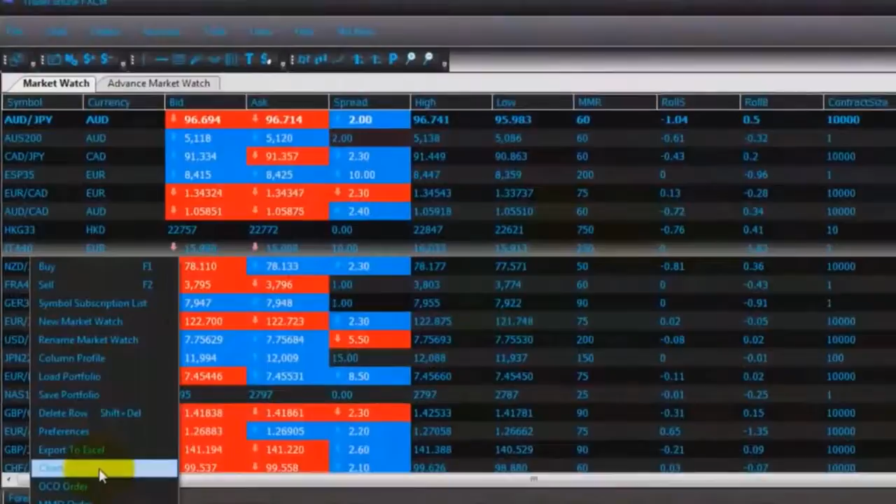In the real world, the answer to the question of can we see into the future has been answered with a resounding no. In our ever-evolving society, the trend today is to look toward the future by relying on predictive modeling to best predict the probability of an outcome. But we all know that even these well-thought-out predictions based on data often turn out to be not so predictable.

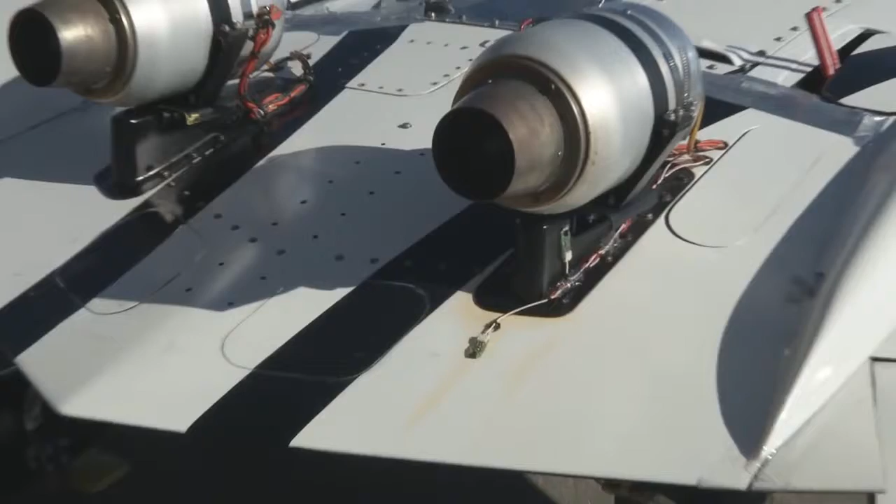Although it's clear that future events remain virtually unknowable, there is one group within NASA that comes as close as you can to seeing into the future. Throughout NASA's field centers, members of the Fixed Wing Project team are peering into the future every day and coming up with concepts that they believe will be on the next generation of aircraft. Because it takes years to plan and develop these concepts, the hardware and theories that are being tested today will be key components that enable the next generation of aircraft to take flight.

On this episode of NASA X, follow us around the country as we visit members of the Fundamental Aeronautics Program's Fixed Wing Project, who are developing the framework that will shape how aircraft of the future will fly. Take a look behind the gates of NASA to see what some of these new ideas look like and how the engineers of NASA are paving the way for the ideas that will change the future of flight.

To the untrained eye, most of the aircraft of today look very similar. This is because over the past century of flight, aeronautical engineers have worked hard to optimize passenger aircraft to the point where they are as efficient and safe as possible. As a result, the basic tube and wing shape has been configured and examined from every possible angle, making it the most efficient design possible today.

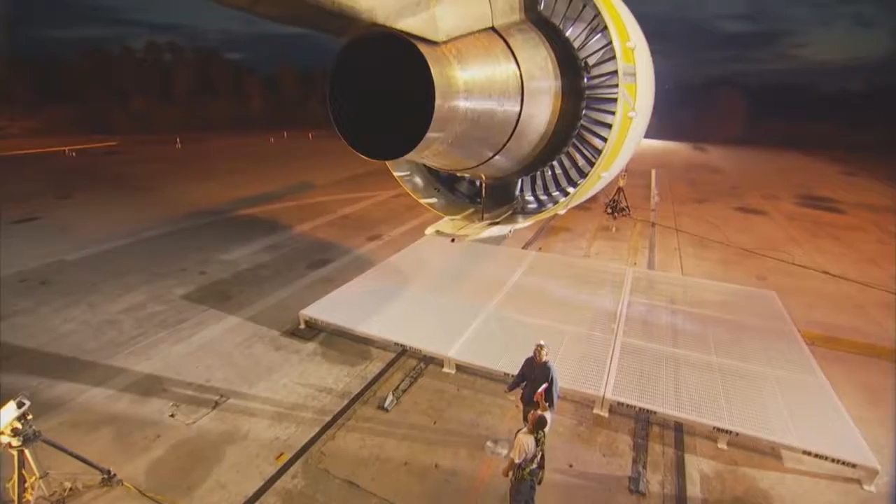Although aircraft have looked basically the same over the past few decades, if you look closely, you can see some of the major design changes. Wings that were once swept back more dramatically now are less so because of advances in aerodynamic shaping. Engines that spewed emissions by the ton are now much more efficient. Materials that were once so heavy that they significantly weighed down a craft are now much lighter and stronger.

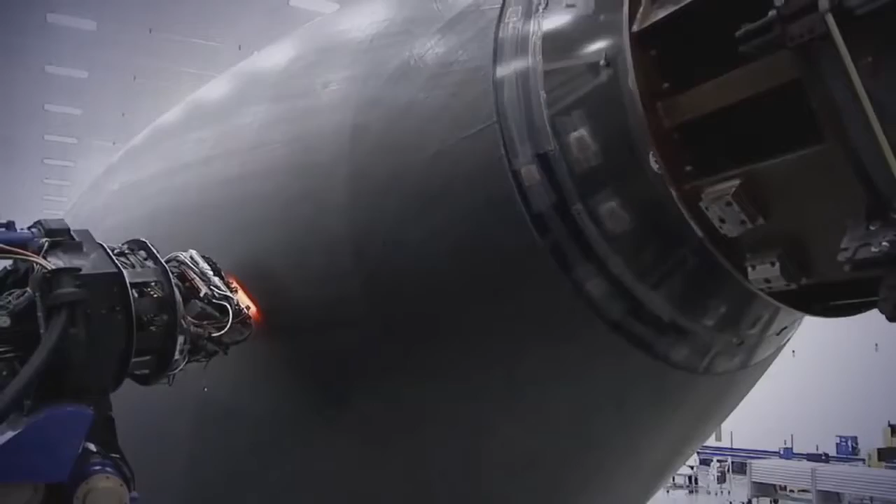With all this improvement and efficiency, it is fair to ask if there is anything else that can be done to make flight even better. The answer is of course yes. Behind the gates of NASA, there are scores of researchers who know that we can still make aircraft better because they are working toward these long-term goals every day. Some of these researchers from the Fixed Wing Project are working on so-called N+3 configurations and goals.

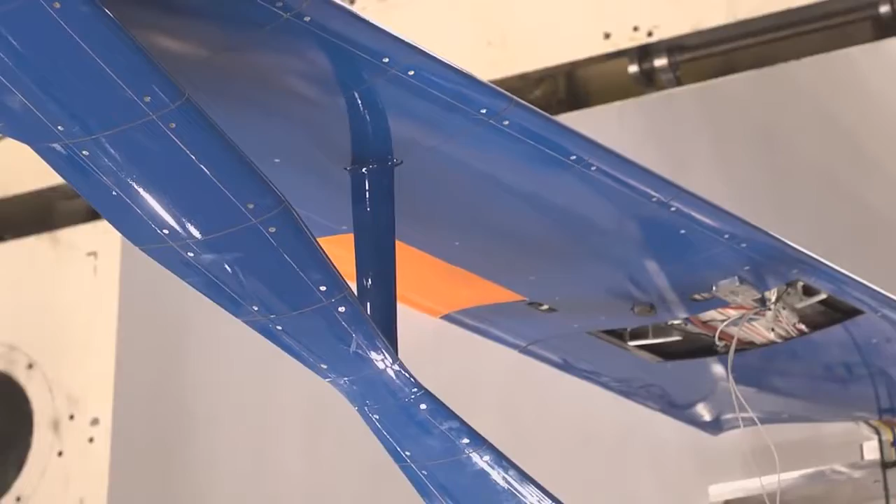In mathematical terms, the letter N is where you start now. N+1 is the next step. N+2 is just beyond that, and so on. Here in the Fixed Wing Project, N+3 equates to aircraft that will be flying in around the 2030-2035 timeframe. For this team, everything is on the table, including engines, fuels, wings, and fuselage shapes.

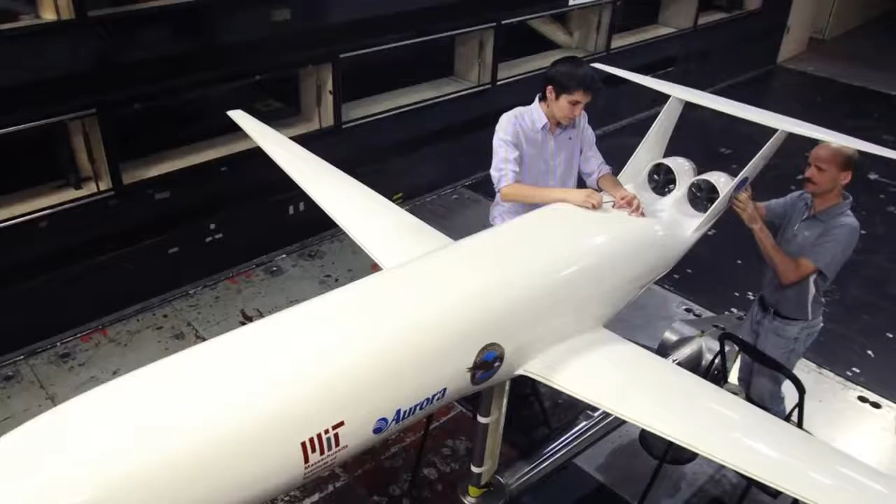Well, we need to remember the first A in NASA is aeronautics. So it's a National Aeronautics and Space Administration. Aeronautics is the field of research for airplanes. The airplanes that fly today were researched and experimented with within NASA many years ago. So we're trying to continue that tradition, that important work that we have done for the nation and the world, for 20, 30 years from now.

Fixed Wing is a NASA research program in which we are doing activities to try to improve the airplanes that we're going to be flying in the future. We're trying to make them less noisy. We're trying to make them better for the environment. We're trying to make them in a fashion that they will use less fuel.

The research we're doing is important because air travel is such an important part of your life. People travel, and even if you don't travel, cargo gets carried every single day. You use something every single day that gets carried by an aircraft. It's part of our way of life these days, and it often gets taken for granted. There are challenges though, so we are focused on exploring and developing technologies and concepts to improve the energy efficiency and environmental compatibility of transport aircraft.

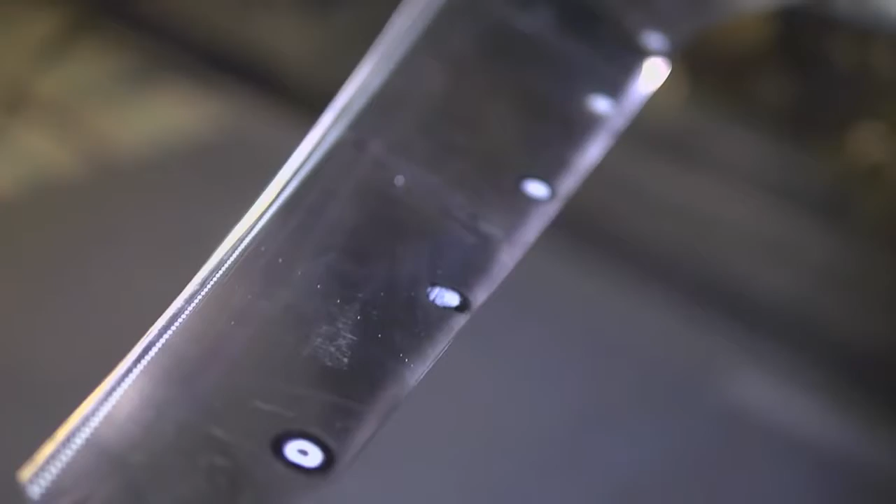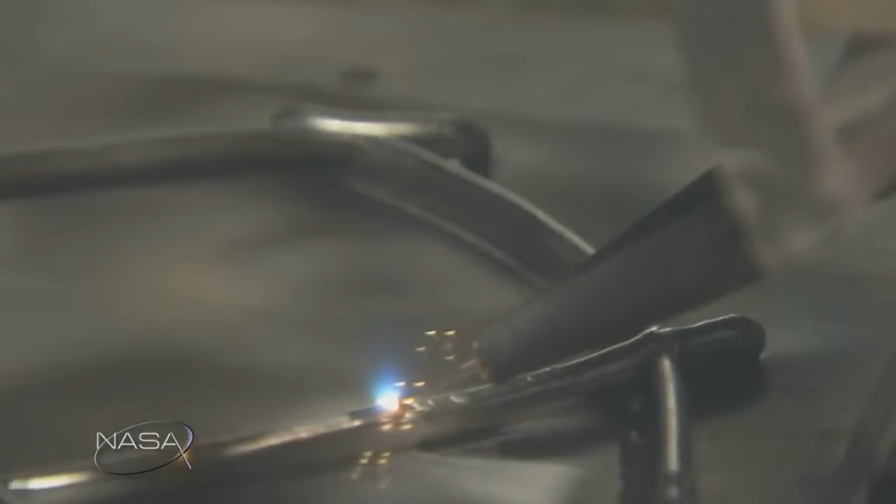With this mandate to significantly lower noise and emissions and increase performance for subsonic aircraft, there will be a need to address virtually every aspect of the current aircraft configuration, including developing new materials and engines, testing alternative fuels, and even changing the fundamental shape of the aircraft.

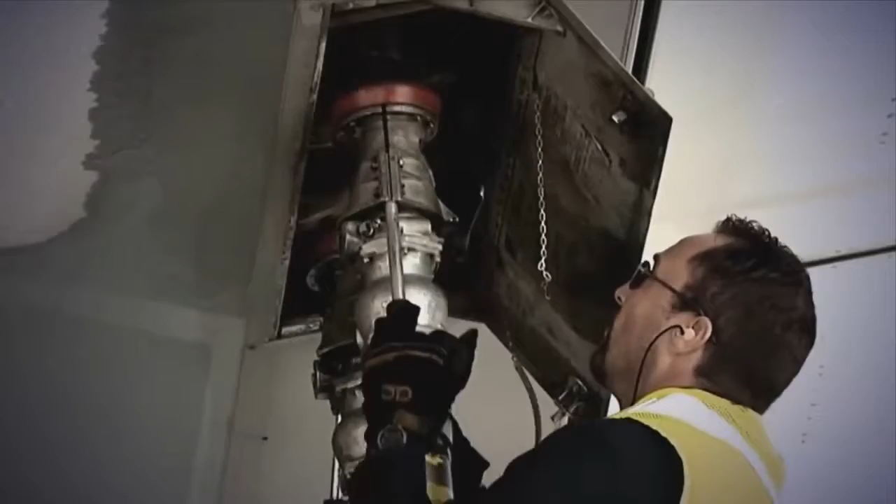All across the country, fixed-wing researchers are doing just that. Major advancements are being made into the understanding of how future aircraft will fly. Because there are so many areas of study, let's first look at something that has the potential to be used today as well as in the 2030 timeframe: alternative fuels.

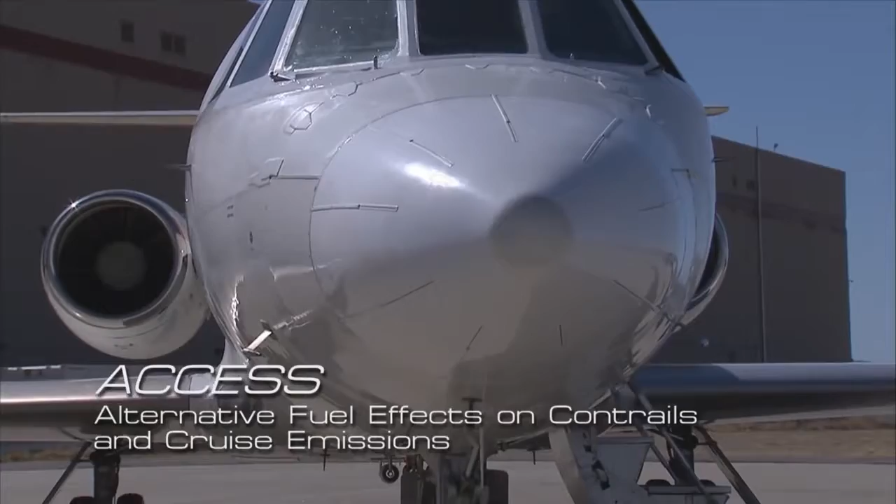On this beautiful morning at NASA Dryden in California's high desert, a test called ACCESS, or the Alternative Fuel Effects on Contrails and Cruise Emissions test, was performed to study the effects of alternate biofuel on engine performance, emissions, and aircraft-generated contrails at altitude. For this test, 2 aircraft were flown in tandem. The first is NASA's DC-8, which will be burning an alternative fuel.

The second aircraft is NASA's Falcon that will fly directly behind the DC-8 to measure and characterize the emissions coming out of the engines from the alternative fuel. Here is NASA's Bruce Anderson to explain. NASA's role is in assessing the combustion characteristics of alternative fuels, as well as determining how these fuels will affect the performance and emissions from aircraft.

To understand how aircraft affect the climate, we need to make measurements at cruise altitudes. So the focus of ACCESS, or the alternative fuel effects on contrails and cruise emissions, was to fly behind the DC-8 in flight and look at its emission and contrail characteristics as we changed from standard jet fuel to a fuel that was a blend of a fuel that was made from camelina plant oil, and also added 50% of Jet A to that.

There are some other groups out there. Tyson Foods is making a biodiesel and biojet fuel from chicken fat that they sweep up on their processing plant floors. So there's a number of different ways of making these alternative fuels. All of them result in a fairly clean kerosene that doesn't have nearly the contaminants in it that the fuels from refineries do. The fundamental thing is the aircraft has to retain its performance characteristics when you burn a fuel.

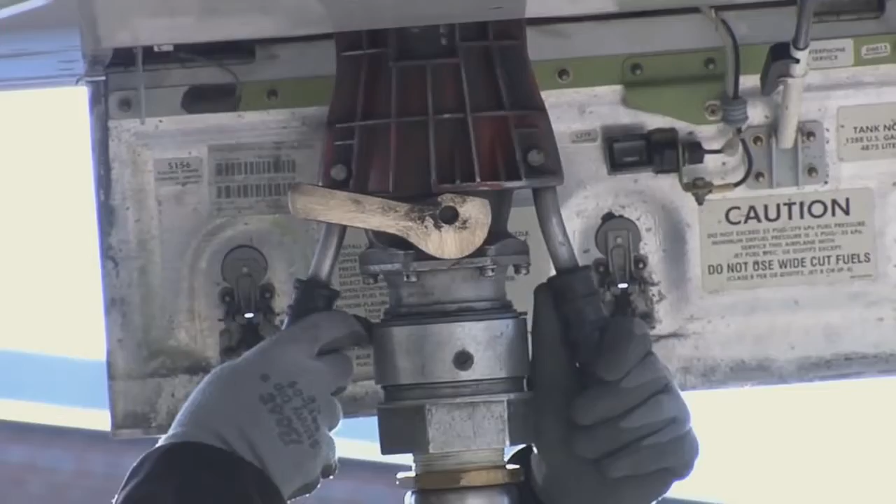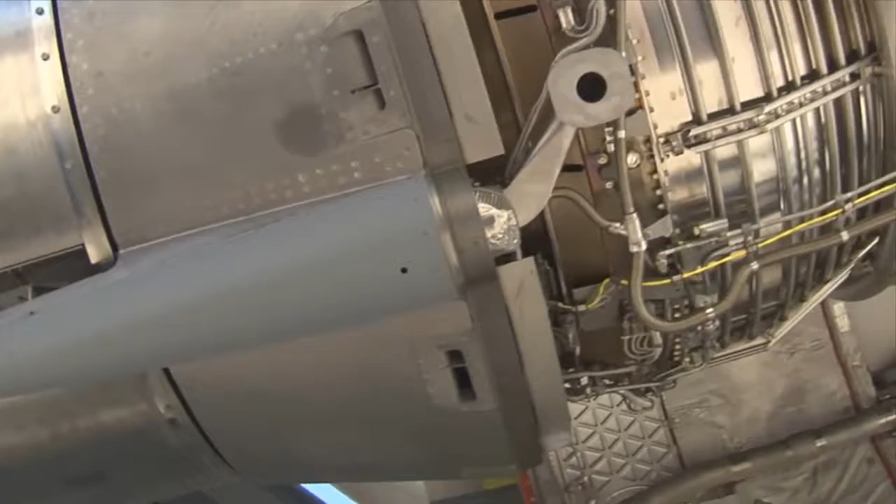You can't have any drop in power. The fuel also has to have similar characteristics in terms of density and volume to kerosene. So what we're looking at is drop-in fuels. A lot of the fuel systems on the aircraft are designed to rely on the aromatics in the fossil fuels to swell the seals to make them leak tight. So when we fly an alternative fuel, we have to mix it with standard fuel to retain those properties. Otherwise, the fuel would just leak out of the aircraft.

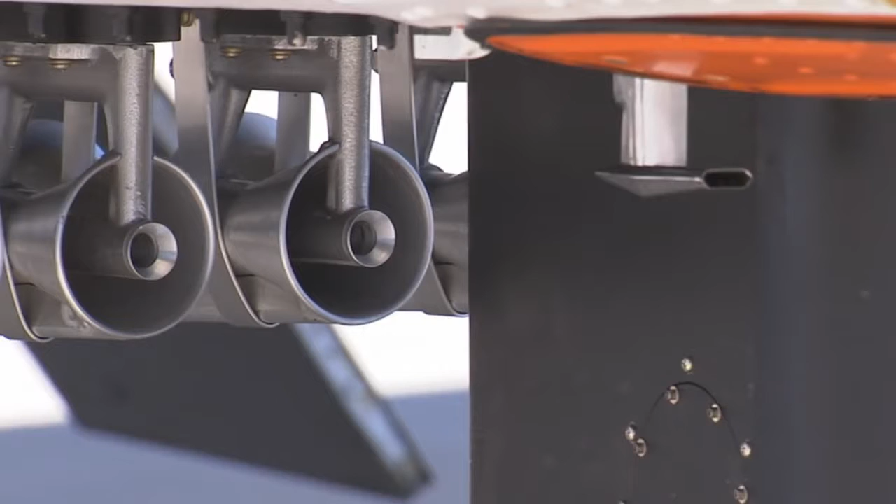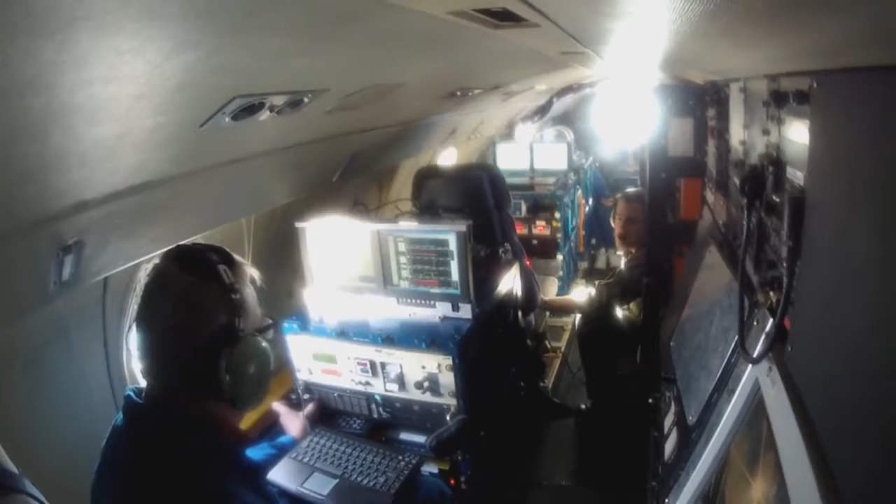And then the second thing we're looking at is just the emission characteristics. By that I mean the amount of pollutant generated per kilogram of fuel burn. After the first few flights, it was shown that using these types of alternative fuels could significantly reduce emissions at cruise altitudes, particularly soot emissions. Work continues to better understand how to use these fuels and how to make them even more efficient for future aircraft.

Other than alternative fuels, there are some other ideas out there for finding more efficient ways to power aircraft. If we look on our roads today, many of the cars that are now being driven run on a combination of fuel and electricity. The idea that aircraft could do this seemed far-fetched only a few short years ago, but today, this idea is gaining traction. There are several ideas on how to do this, so let's take a look at a few.

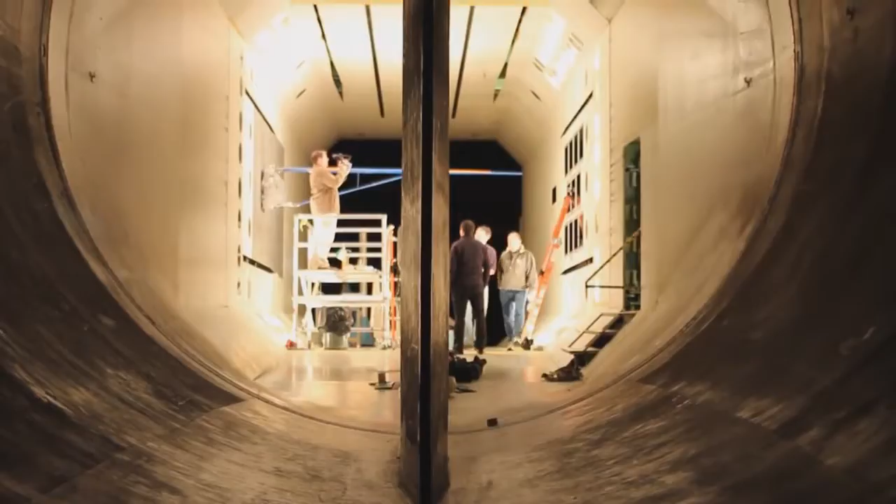Here, a team is looking over a new Boeing aircraft design called Sugar Volt. This unique design has several interesting changes, like the truss-braced wings that have the potential to reduce the drag of the wings by making them longer and thinner. Because thin, long wings have the tendency to flex more, designers have included a clever, efficient truss structure to support them. This design has the potential to reduce drag and weight, thereby making the craft more efficient to operate.

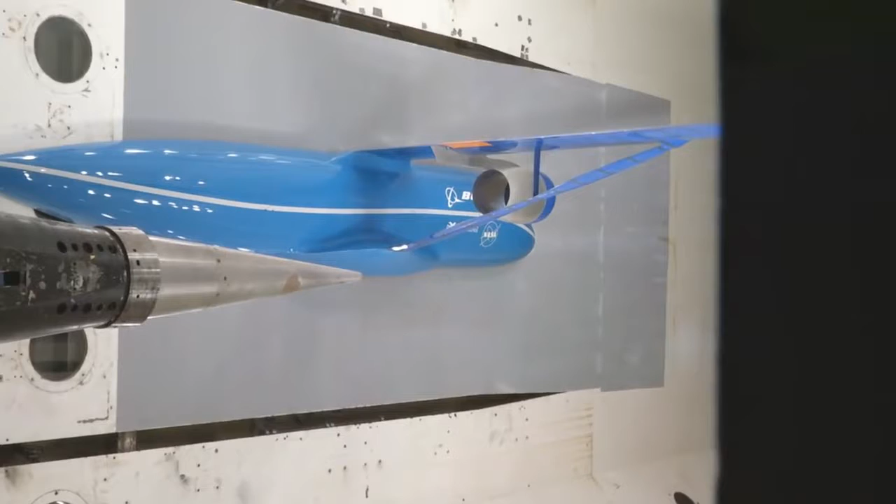At first glance, those unique structural changes may look like the biggest game changer for this type of aircraft, but the Sugar concept holds another surprise as well. In the case of the Sugar concept, what's less obvious to the eye when you see it is that it has an unconventional propulsion system. It's a hybrid gas-electric concept that's closer to what you see in a Prius. It has batteries and a gas turbine engine technology.

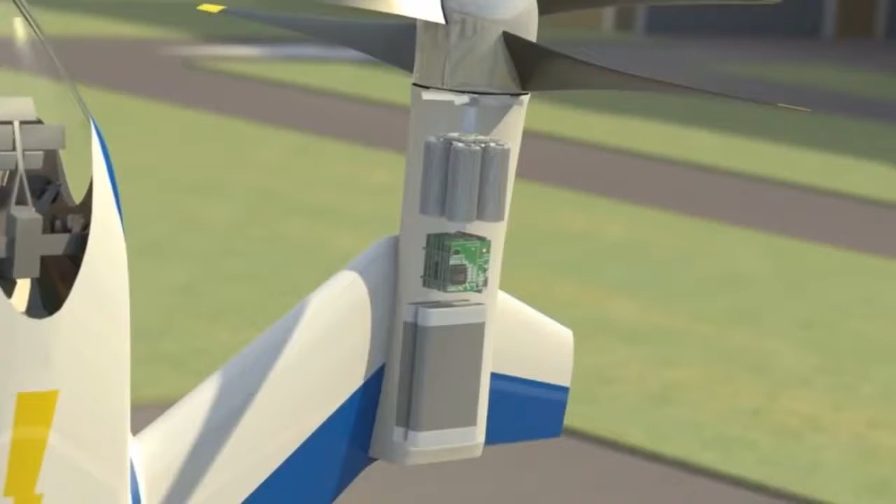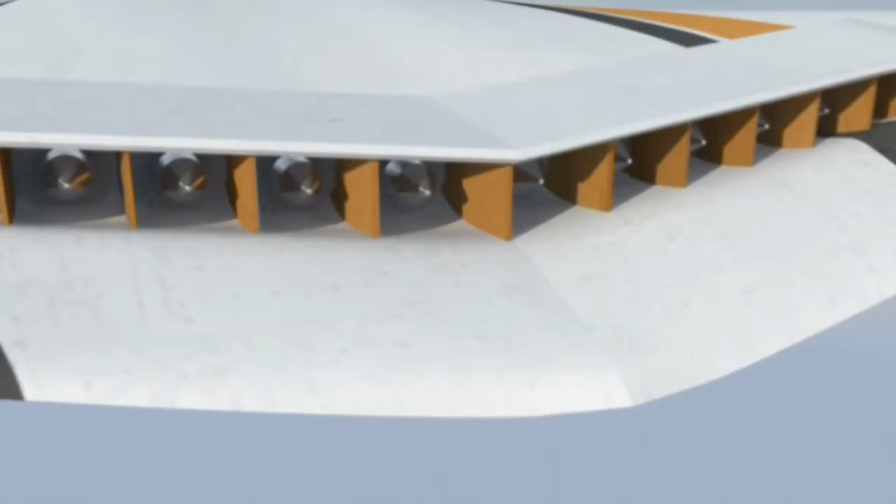It requires advances to battery technology, but those are happening throughout the world independent of the aerospace industry, and we're trying to leverage that. We do it on cars, we should be able to do it on airplanes eventually. The challenge is to take those batteries and have enough energy or power content and have them be lightweight. Where we are today, I think, is we're at the dawn of the age where we can start to see electric propulsion or hybrid electric propulsion.

And you'll see it on smaller aircraft first before you see it on the large commercial transports. But that's what we're working towards. It's good for cleanliness, it's good for noise, it's good for energy efficiency. Has its challenges. That's why we're working on it, and that's why it's not being done today.

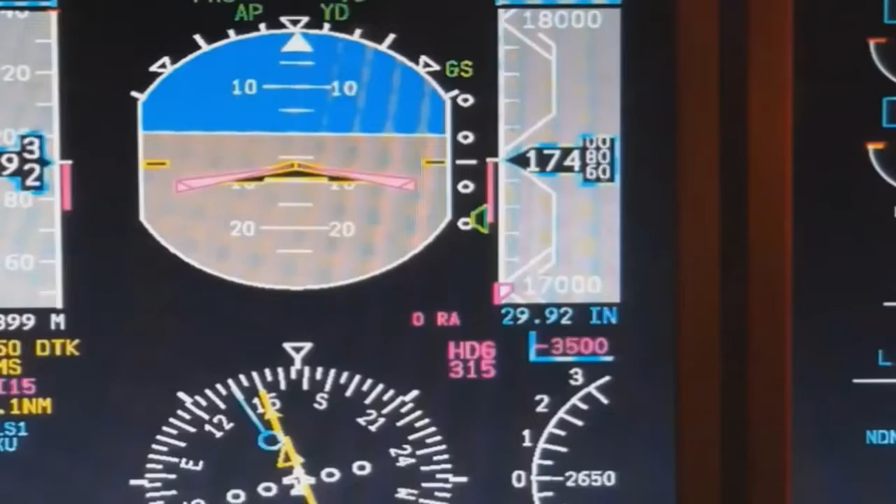The idea behind this vehicle is to have its twin engines burn fuel when great power is needed, like at takeoff. But when the craft is in a cruise configuration, a switch can be made over to a battery electric mode to supplement or even replace power to the engines. If successful, this could reduce the amount of fuel burn by up to 70%.

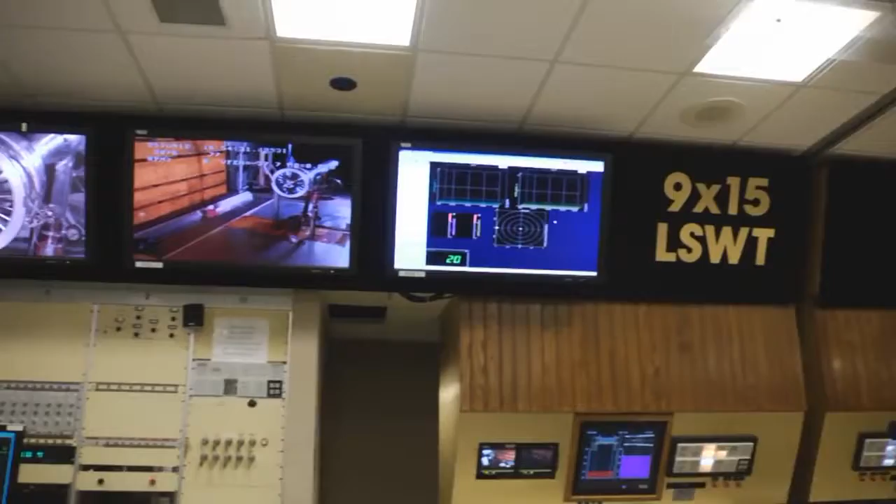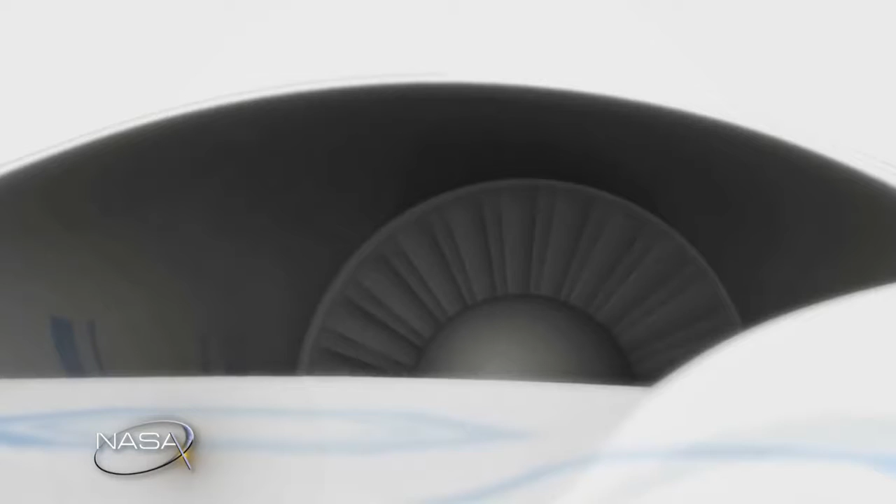Another concept called turbo-electric propulsion is being studied here at the NASA Glenn Research Center. Here is NASA's Jerry Brown to explain. There's not been electric airplanes except in very small size. And the reason is that electric motors and generators tend to be too heavy for flight. We're hoping to change that, and we're hoping to get a benefit from saving a whole lot of fuel in the process. The type of electric propulsion that we're talking about today is turbo-electric propulsion.

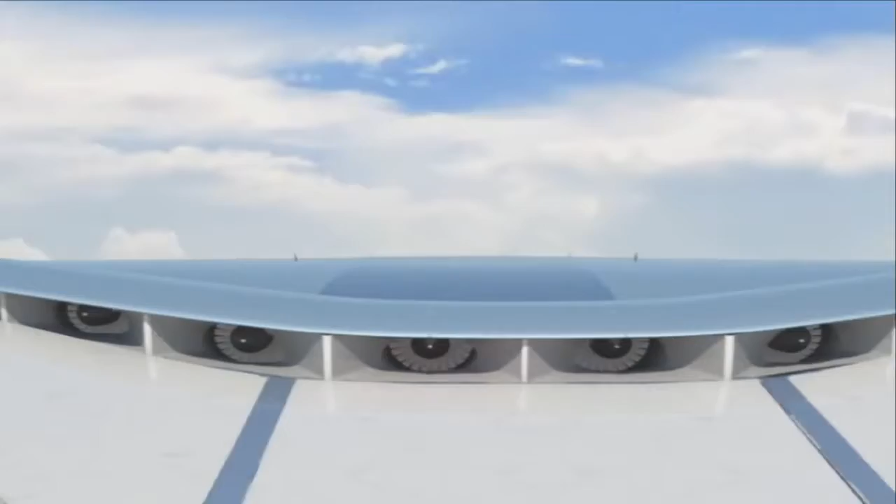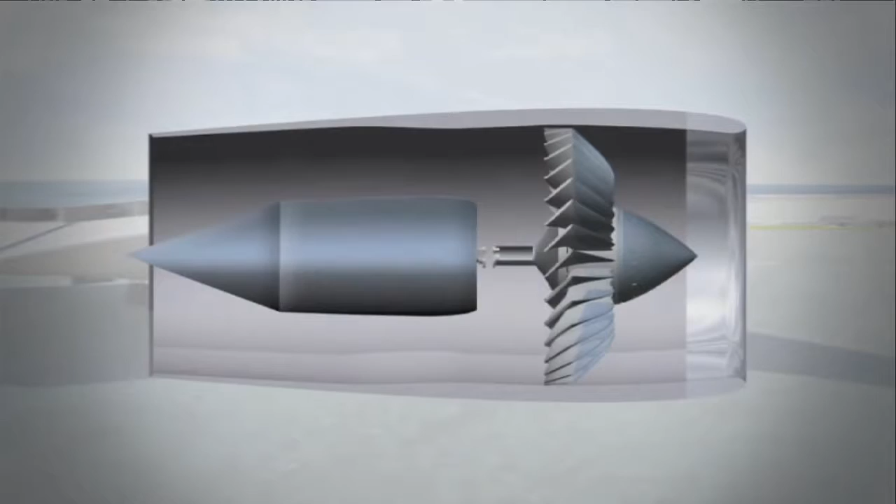We're going to keep the turbine engine because it's really good as far as a lot of power in a small power plant. And then we're going to use its power to drive a generator, send electricity to motors that drive fans that do the propulsion. This concept will look very different from vehicles of today as well. Potential designs include 2 large turbine engines on the wingtips that will drive 2 large generators inside the body. The generators will in turn power a number of fans, providing the propulsion the aircraft needs to fly.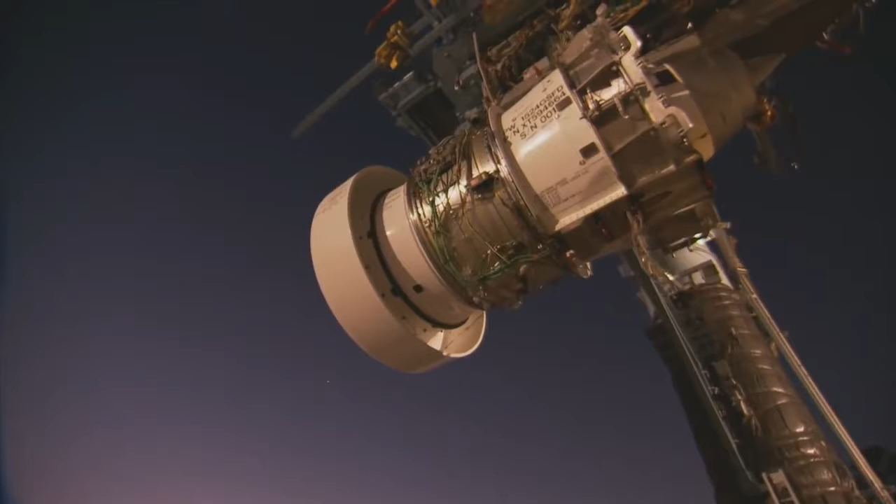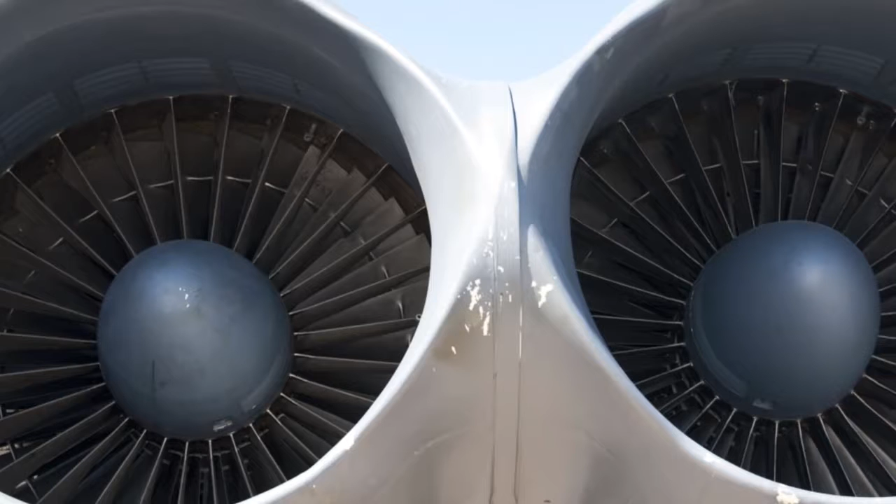What we want to do here is we want to be able to break the turbine engine from the fan, and that gives the aircraft designer a lot of freedom. If he can move the turbine engine somewhere else in the airplane, that may itself have advantages. The engine and the fans don't have to turn at the same speed. You don't even have to have the same number of fans. And that's what we're really looking for, is we want to have an array of a whole bunch of fans, maybe 15 of them, say, and just 2 engines. You like to keep just 2 big engines because the big engine is much more efficient.

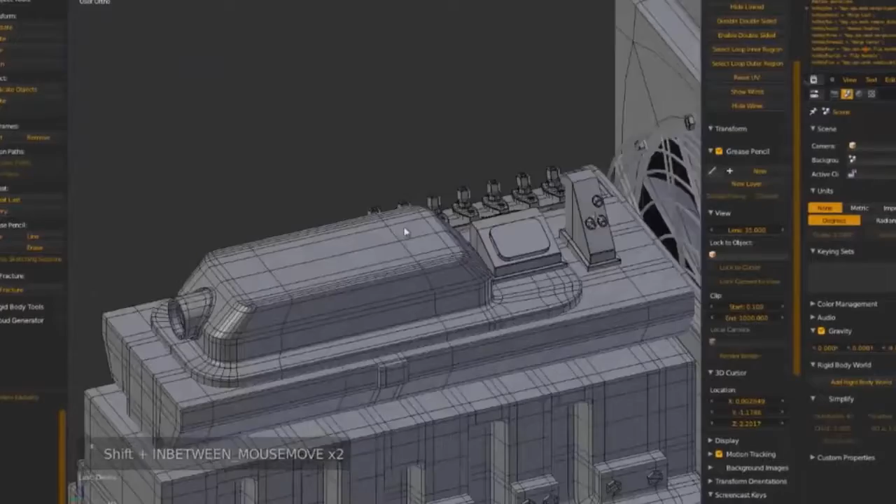This idea is intriguing, but big changes need to be made to make it viable. One major challenge is the need to reduce the size of the generators, because the generators of today are way too big to fit on an aircraft. One idea that the NASA team is looking at is a way to remove the current type of copper windings in the generator and replace it with superconducting material. This change would allow the generators to shrink, making them viable to fit on future aircraft.

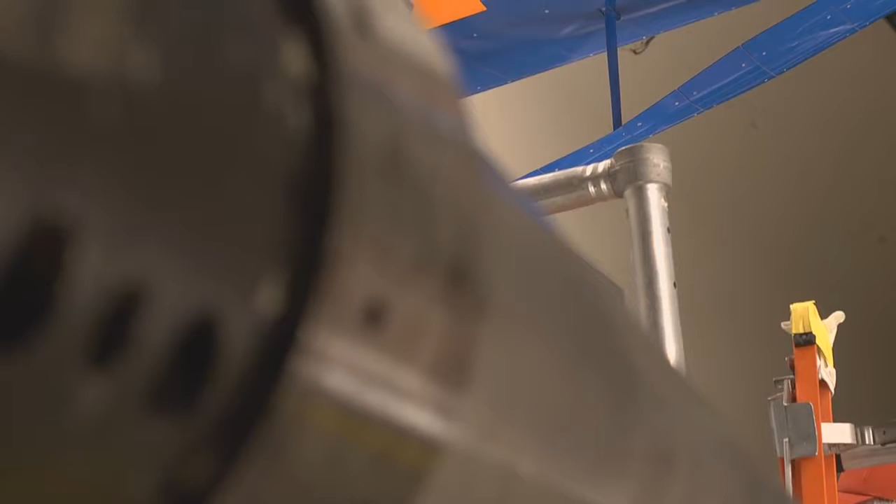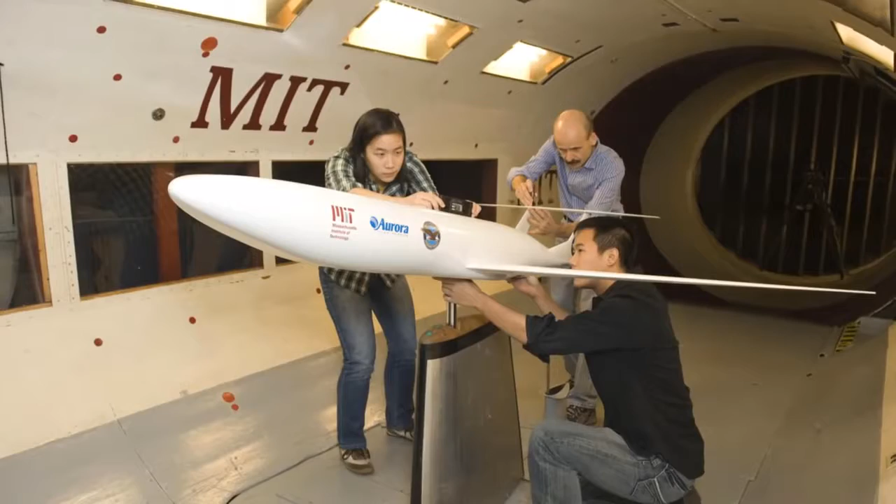As we've seen so far, new aircraft designs are coming online that have the potential to greatly improve aircraft efficiency. Another of these revolutionary designs has come out of a joint MIT and NASA study. This unique design is called the double bubble and has the potential to reduce fuel burn by up to 70% as well. So the MIT D8 double bubble design was something we've been working on with MIT for a number of years. The idea there is to take some of the lift that you would normally get from the wings and try and move that to the fuselage.

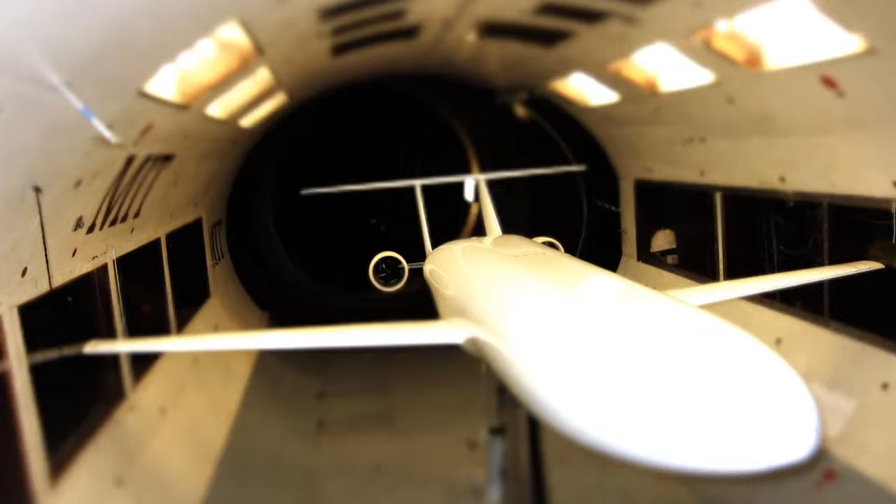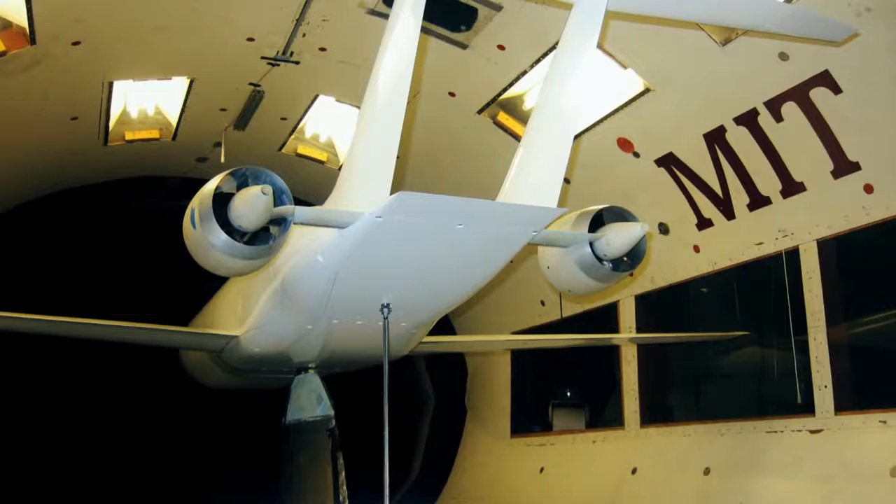It has 200,000 processors working on the problem if you use the whole machine on one problem. So it's a very large machine, and we need that very large machine because we need to do very big problems here at NASA.

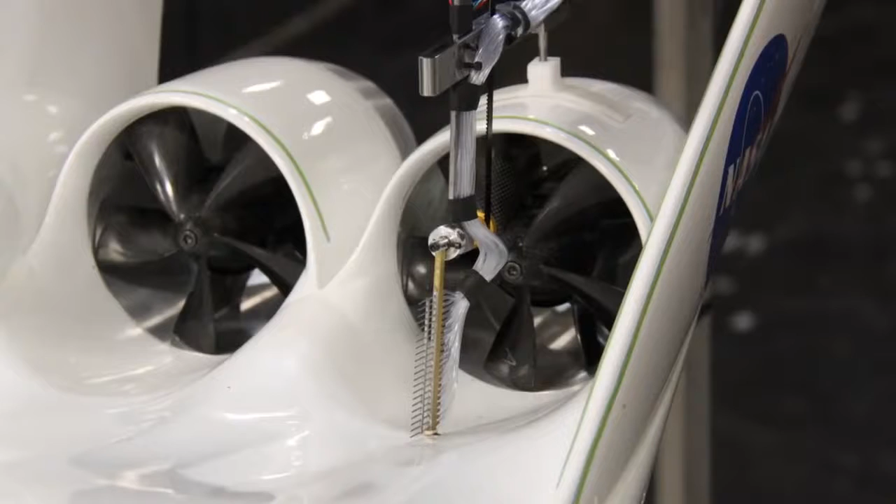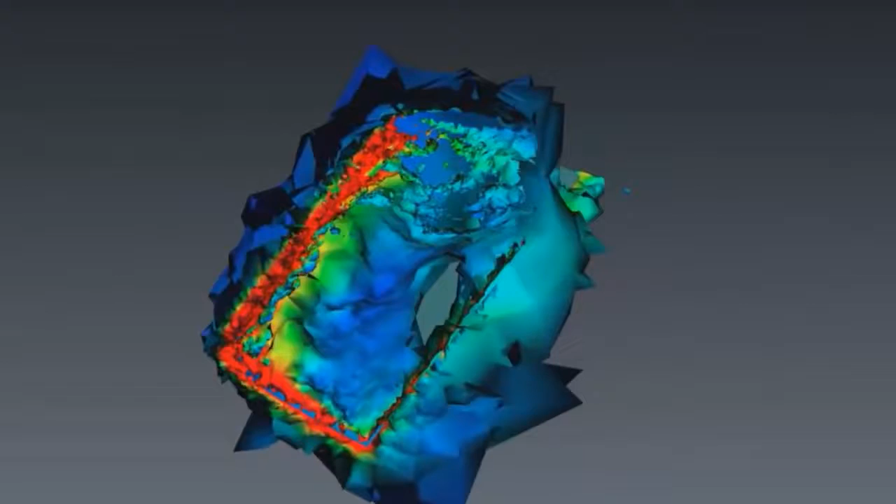The Aeronautics Research Directorate that we're using it for is to try and simulate the flow over these N+3 configurations. So in order to capture all the detail you'd see on a vehicle like this, including what's going on inside the combustors of the engines and things like that, you need to have a lot of grid points to resolve all the fluid motion inside those engines, over the airplane, and having that many grid points to resolve all that physics in 3 dimensions creates very large computational grids that require very big machines to advance the equations that govern the fluid motion and get these CFD, computational fluid dynamics solutions that we use to make our assessments.

Aerodynamicists of today are able to model ideas on computers, which allows them to test many different configurations before a wind tunnel model is ever built. Once a design is agreed upon, a wind tunnel model can then be fabricated and tested. This process was used for the double bubble as well, but the wind tunnel test showed surprising results.

The good news is we've just completed the first test of this configuration in the Langley 14x22 wind tunnel at NASA Langley, and it showed even a greater reduction or a more fuel efficiency benefit to this technology than we had predicted on paper with our lower-order models. So we're trying to digest the experimental data that show this nice benefit in fuel efficiency from this configuration.

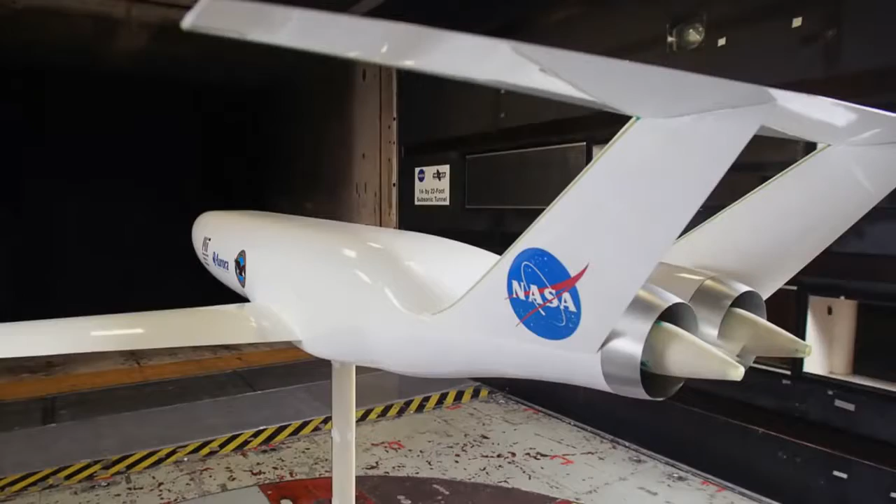At the same time, we're also using the supercomputer here at NASA Ames, the Pleiades supercomputer, to do computational fluid dynamics CFD runs of these same configurations and see if we can confirm that benefit on the computational side as well. Testing will continue on the double bubble, and if the results hold, you may see this type of aircraft at an airport near you in the future.

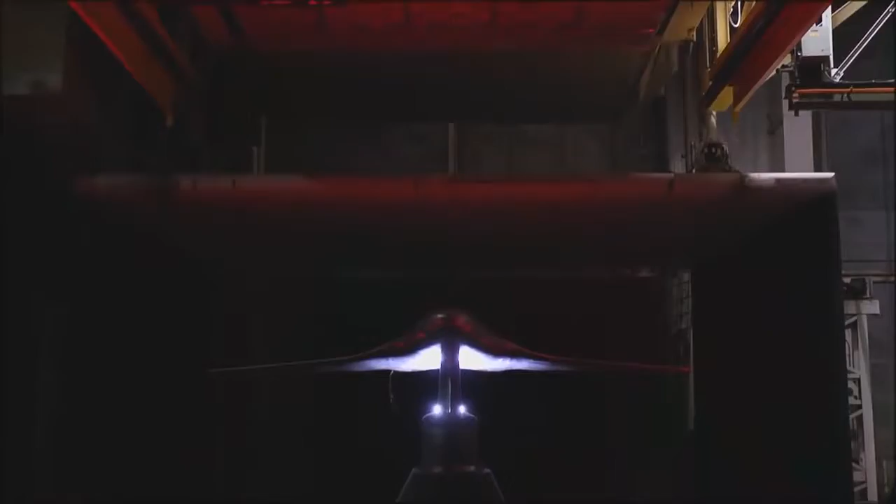When testing aircraft, many different stages occur. We have already mentioned CFD and wind tunnel testing, but another tool in testing future designs is to build a flying scale model. Although CFD and wind tunnel modeling is the mainstay, often test flights of these small, scaled-down versions of an aircraft offer some of the most dramatic results for researchers. That is the case with this aircraft, called the X-56.

This aircraft is being used as a test bed to understand how different wing configurations work and how a unique idea called active control may be used in the future. The whole concept behind the X-56 is that they've long known that a very long wingspan vehicle is more efficient than short wingspan vehicles. Problem is though, when you get a very long wingspan, you start to get into issues with flutter modes that start to creep into the vehicle, so that the wing will go unstable and in extreme cases will rip off the vehicle. To get around that problem, you can use active flight controls to suppress those flutter modes.

Active control is you put things like accelerometers within the wing, and as soon as you sense that the wing is starting to get into these flutter modes, you use the control surfaces behind the wing to damp that out. So the airplane, as it's flying, is continually fighting these modes and keeping the wing straight and stiff. Then you can build a lighter, longer wingspan vehicle that is more efficient.

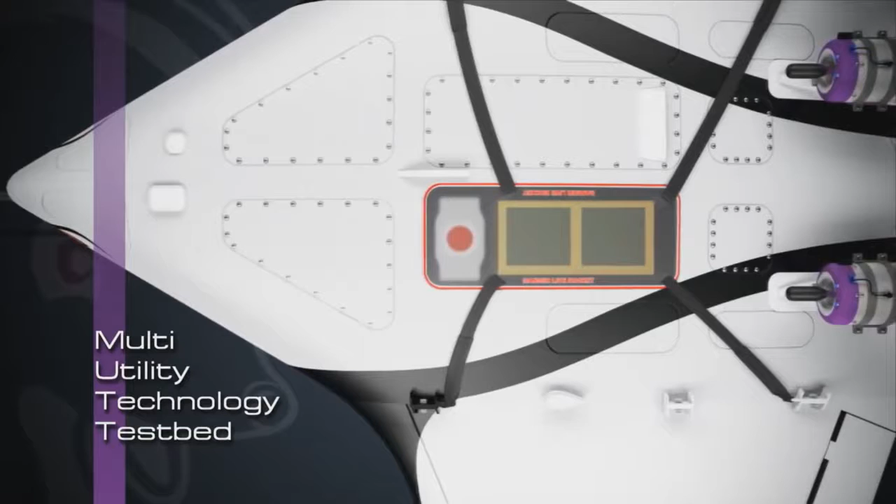This vehicle, as funded by the Air Force, was built as a multi-utility technology test bed. They call it the MUTT for short, and it is built to do a lot of different kinds of testing in aeronautics. The wings are removable. You can put on a stiff wing, you can put on a flex wing, you could do a joined wing configuration. We can learn quite a bit from testing this kind of vehicle. Right now, the focus is on flexible wing and active control of flexible wings, but in the future, there are many experiments that can be done with this vehicle.

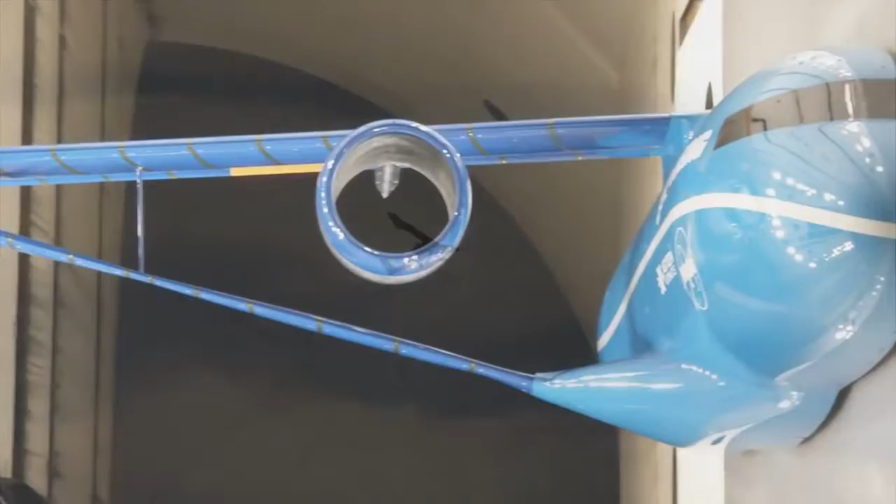The research on the control of lightweight, flexible wings being performed today on the X-56 is key to enabling the long, thin, low-drag, and low-weight wings of tomorrow's N+3 configurations. Much is going into understanding what it will take to improve the already incredibly efficient aircraft of today into ultra-efficient vehicles of the future. Although we don't have all the answers yet, it's clear that NASA and its brilliant engineers and researchers are helping to lead the way to a safer and more efficient way to travel.

We are nowhere near the maximum that we can get out of this industry. And there is a lot of work to do, and that's what my team is doing. That's what we're doing within NASA, and I cannot wait for the future.